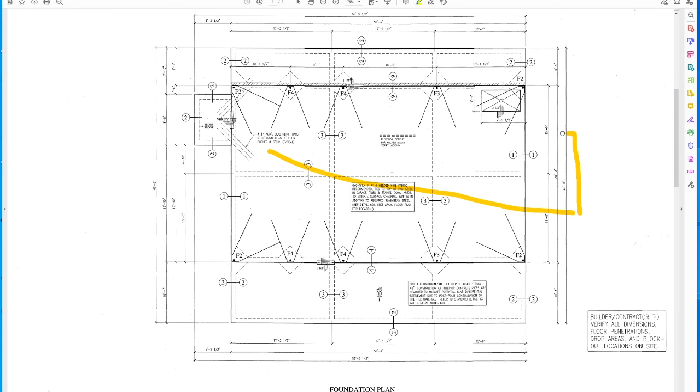So this is all stuff that you need to read, okay? For example, let me try to draw it for you. If your ground looks like this, and then you come in and build your slab, you fill it in like this, and then you put your slab on top. If you have more than 48 inches of fill from here to here, you need to put piers in there. So you've got to read these plans.

What happens is, if you don't follow these plans to the T... see, you have to do a pre-pour inspection. You cannot pour until you pass by the engineer. Otherwise, it is not an engineered foundation. This is what the engineer tells you to do. Without a pre-pour inspection that you passed, technically you don't have an engineered foundation, okay?

So you need to be able to pass, or your builder or your concrete guy needs to have proof that they passed this inspection, because until then you have nothing. And obviously the only way to pass it is if they do it exactly like the engineer recommended. So all these notes are very important. Now let's go. Oh, by the way, down here it tells you the scale.

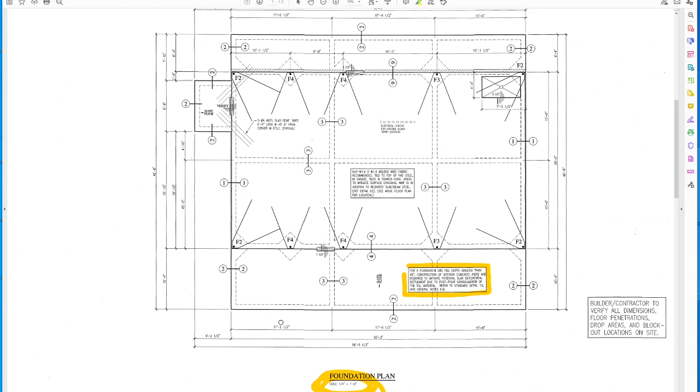So we kind of touched on that real quick, but the first thing you need to do is find a dimension that is fairly easy to read. For example, this one, 15 feet, okay? You need to scale with your tape measure from here to here and make sure that you get exactly 15 feet. Because if you don't, then your plans are not to scale.

Now, if you don't need to scale anything, it doesn't matter, because you can simply follow these dimensions. But if you have to scale anything, you're going to be off. Okay. So anyway, that's where we're at so far.

Let me read some comments right quick. Could you discuss the reason for not using post-tension style? I don't have a reason. I'm going to do a video soon about it because we quit using it, but it's not because of low performance. It's mainly because it's a nightmare to get it done around here. You have to send subs back and forth. It's a nightmare.

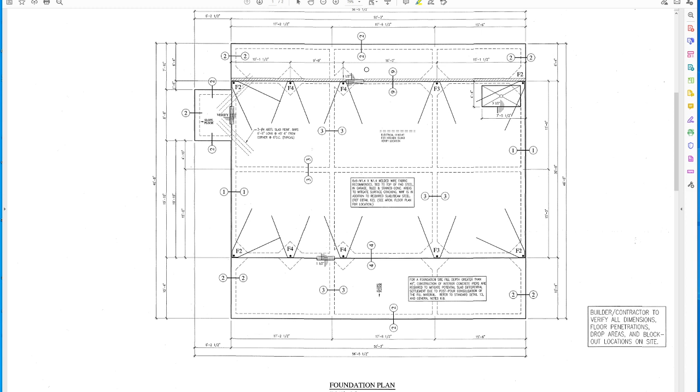And all these footers right here, they have F3, F2, F4, F4, F2. So what does all that mean? Okay, so let's look at 2 first. So the 2 right here means notes on page 2, okay? So you're gonna go to the second page and you have to find number 2 right here.

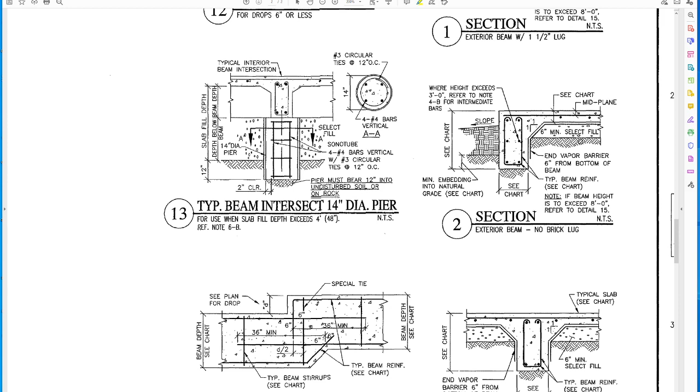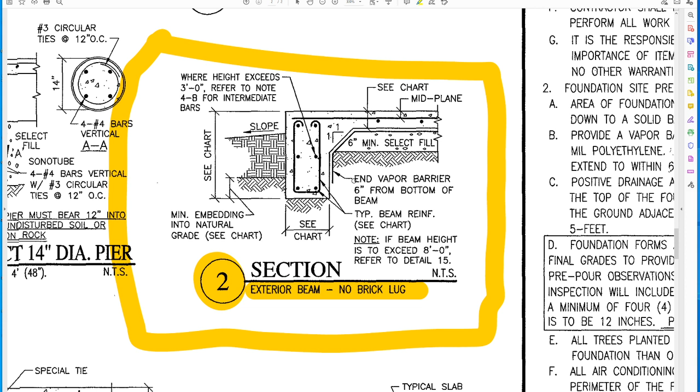This is number 2 right here, okay? It says exterior beam, no brick lug. It tells you right here exactly how to build this beam. A lot of people ask us how come we don't do the vapor barrier all the way to here. Right here, this is why. It says right here, end vapor barrier 6 inches from bottom of beam. So that's how we do it.

Again, you have to be very careful to read everything because that's how you have to follow their plans. Different people do it different ways, but this engineer is asking you to do it this way, so you have to do it that way, or you may not pass inspection. Here's your stirrups, okay?

And it tells you right here, see the ground outside the foundation? It tells you that you need to have your ground sloping this way, and it says see chart. We're gonna go look at that chart shortly, but let's look at the rest of the notes. It says where height exceeds 3 feet, refer to note 4-B for intermediate bars. These mid bars are not needed unless that beam is deeper than 3 feet.

So you need to have 6 inches minimum of the select fill, and then it says typical beam reinforcement. Here's a note: if beam height is to exceed 8 feet, refer to detail 15. So when I say you need to read plans, you literally need to read the plans because it's all here.

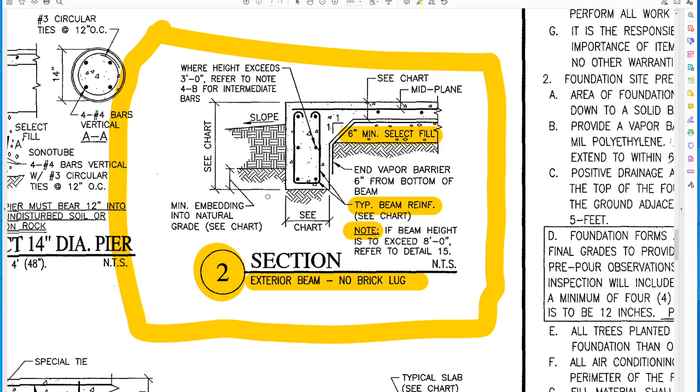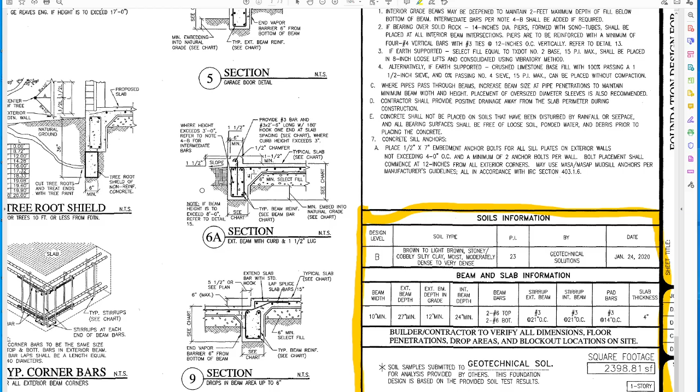Okay, D height is asking, what does no brick lug mean? So imagine a foundation, I'll show you right here. See how the foundation goes this way, and then it drops down and it goes out. This right here is your brick lug. It's just a lug that drops down.

Your foundation's like this, drops down 1.5 inches, then goes out 5.5 inches, and then goes down. And right here is where you're gonna put your brick. The reason for this 1.5 inch drop is so that water doesn't go inside your house. So that's what it means by no brick lug.

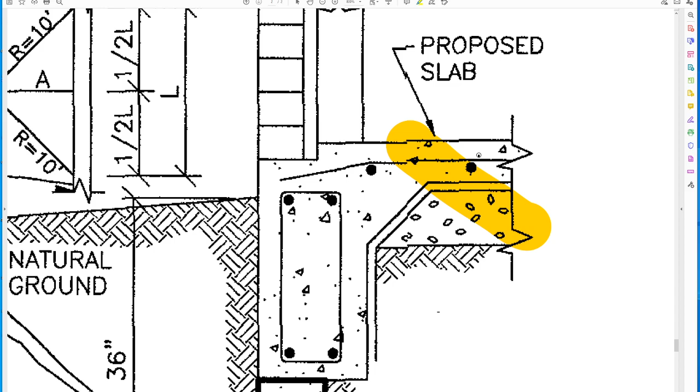All right, let's go back to the chart. So this chart right here tells you what you need to do, what you need to know. It talks about the soil information. So we submitted soils, we submitted soil information, so this is what they used.

So design level B, the soil type: brown to light brown, stony, cobbly, silty clay, moist, moderately dense to very dense. PI is 23. PI stands for plasticity index. The lower the better, within reason obviously, but 23 is very good. If you get above 30, you're starting to get into very expensive soils. So that's how that works. It shows who it was done by and when they did the soil report.

Here is the chart that you need to really pay attention to. This is your beam and slab information right here. So your beam width, how wide those beams need to be. They need to be 10 inches, 10 inches wide or wider.

They can be wider. So exterior beam depth, that means how deep your perimeter beams are. 27 inches minimum. You see that it says minimum there. They can be taller. Obviously, if you have sloping ground, as you saw up there, they have a different detail if you go above 8 feet, but minimum is 27 inches.

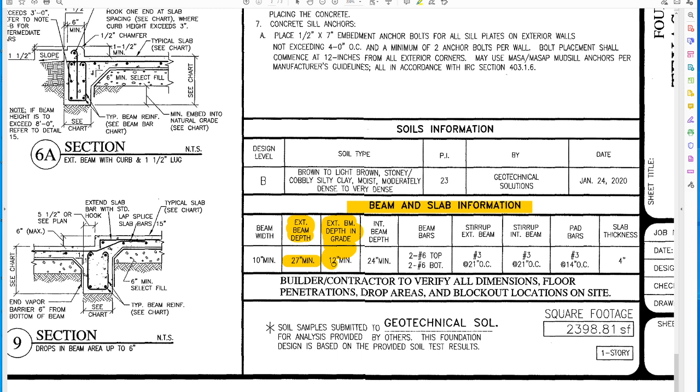This one is super important right here. It says exterior beam depth in grade. What that means is you have your perimeter beam here. I'm going to try to draw it over here for you guys. So you have your perimeter beam. Let's just say, back to your fill dirt, this is what your pad looks like, and then you have this much fill right here. Then you put your slab up here, your forms, and then you come in here and you dig your beam right here.

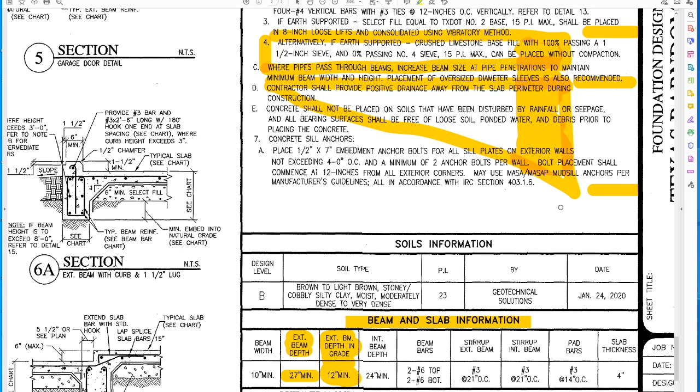And you come in here and you go 27 inches from here to here. And let's just say your fill dirt is 24 inches from here to here. You need to be 27 inches minimum, but also you need to make sure that you are, like it says here, 12 inches into grade. Grade means undisturbed ground. See, this right here is all fill dirt. That does not count as grade.

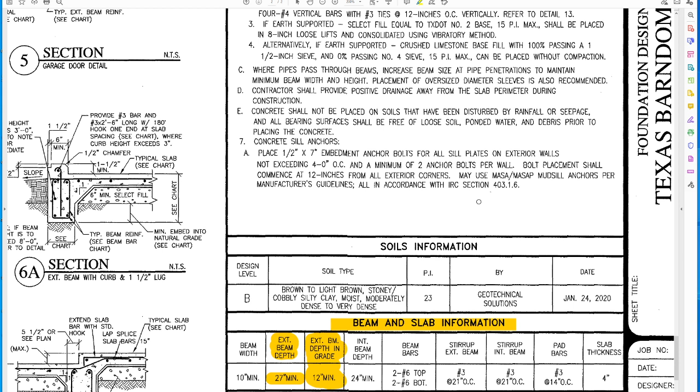So first you need to get through that fill dirt, and then you need to go 12 inches into grade. This is your grade. So if you only go 27 inches, you are not going to pass your inspection, because you have to take those two into account: the exterior beam depth of 27 inches minimum plus your exterior beam depth in grade. So that's very, very important.

I've seen people fail foundations because they did not pay attention to that second one, the exterior beam depth into grade, because again, they go together.

Enrique said, I think Manny made a video about that. Yeah, I went and checked, and he did not take this one into account, the into grade, so we had to dig it up after the rebar had been put in. So Manny learned his lesson, he did not look at the second one. So yeah, Manny made that mistake.

So anyway, moving on. The next item says interior beam depth. That's pretty simple. That just means your interior beams, how deep they are. You have perimeter beams, and then you have your interior beams. The interior beams need to be 24 inches minimum.

Now right here you have beam bars. You have 2 number 6 on top and 2 number 6 on the bottom. That just means your rebar. The number on rebar means how many eighths are in that piece of rebar. So a number 6 is 6/8, which means it's a 3/4 inch rebar.

That's what that means. Typically we use a number 3 or number 4 on the mat, on the surface. Number 3 is 3/8, number 4 is 1/2 inch, and so on. Speaking of that, here is your stirrup for the exterior beams right here. The stirrups are number 3s, which are 3/8, 21 inches on center. So your stirrups need to be every 21 inches.

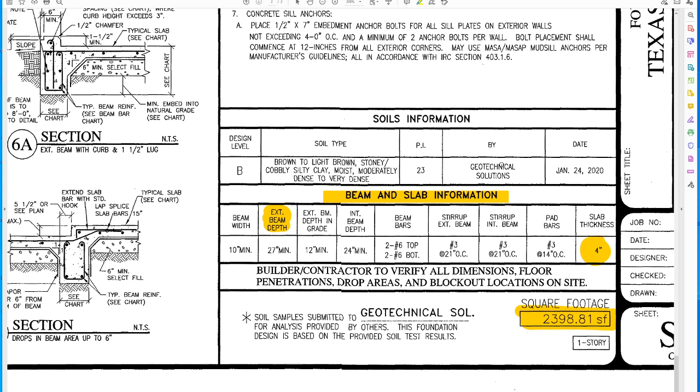Ramon Garcia: can you make a video on how to square a building on the footer? I have that video, Ramon. Go to my early videos, and I did one on how to square up a foundation. It's one of the very early ones. So go to our channel, go to the very beginning, and I have one on there. It goes into very deep detail on how to do that.

What's the diagonals on the footers? Oh yeah, we still got to talk about that. We'll get there. Who does our slab engineering? We use GE Reeves Engineering. That's who we typically get the plans from.

Are the bottom bars tied to the other metal to keep them off the bottom of the trench? Yes, they are tied with the stirrups, and of course then we put bricks under there. You do not want your rebar touching dirt anywhere or touching your forms. If you look at these drawings right here, it is very clear, it shows right here.

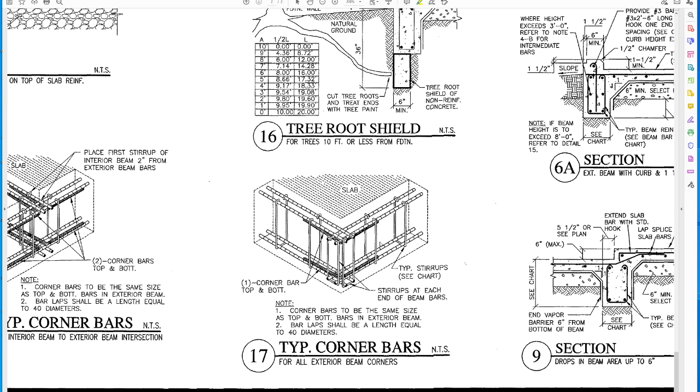Every drawing that they have shows rebar. Of course, here's how you're supposed to tie your corner bars. Right here, okay? They give you very detailed drawings of how to, this is your corner bars right here, how you're supposed to tie them. And it tells you right here, these are your stirrups. And remember, these are 21 inches spacing. You need to have stirrups at the very end.

This is one right here where people a lot of times will fail inspection. A lot of the rod busters, the guys that do the rebar, they start with this stirrup right here, and this one here, and then they tie these bars here, here, here, and here. And same on the bottom, and then they do the corner bars, and they're done. And then the inspector comes, and the first thing he's going to notice is that these stirrups right here are missing. You need to put them in while he's there, or you're going to fail your inspection.

What does that mean? That means, one, you're gonna have to delay your pour. Number two, you have to pay for your inspection again. So you do not want to fail your inspection. Of course, you have more notes right here. It says corner bars are the same size as top and bottom bars and exterior beams.

Number two, right here, this one's important. Bar laps should be a length equal to 40 diameters. What does that mean? Well, we're doing number 6 right here, so you multiply 3/4 times 40. That's 30 inches. So your beam laps need to be at least 30 inches long. They can be longer than that, but minimum 30 inches, and they will check that. So be very careful.

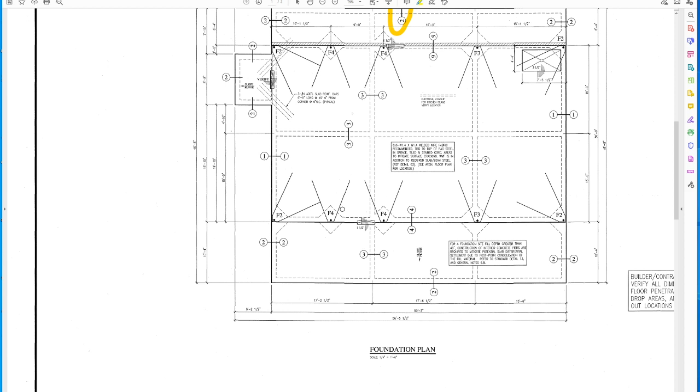Sorry about that. So the diamonds that we're talking about, the pads, you have two types. You have this one, which is half, and then this one, which is full. Okay, and then you go to page 2. Here we go. All right, here we are, and here they are. Okay, here's the half, and here's the full one. Okay.

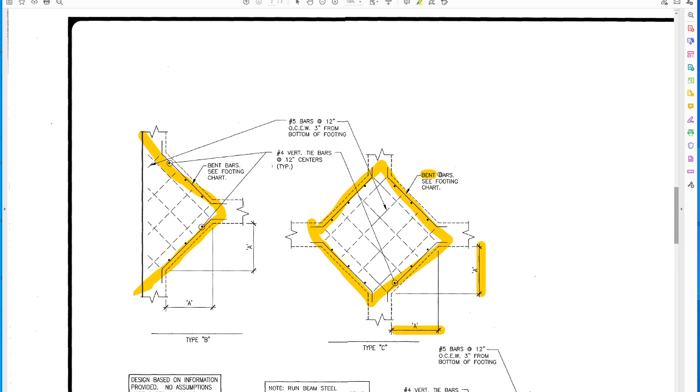All right, and then you have your A dimension. Okay, and it tells you how to tie the rebar. Okay, it tells you bent bars, see footing chart. So that means we have a chart that we need to look at. Here it says number 5 bars, 12 inches on center each way, 3 inches from bottom of footing.

Okay. So remember the F2 and F3 and all that. That's right here. Okay. So if you have an F2, the A dimension is 2 feet. The depth is to match the beam depth. And reinforcing, you have 2 number 6 bar X. Those are the bent bars that they're talking about, and you have top and bottom.

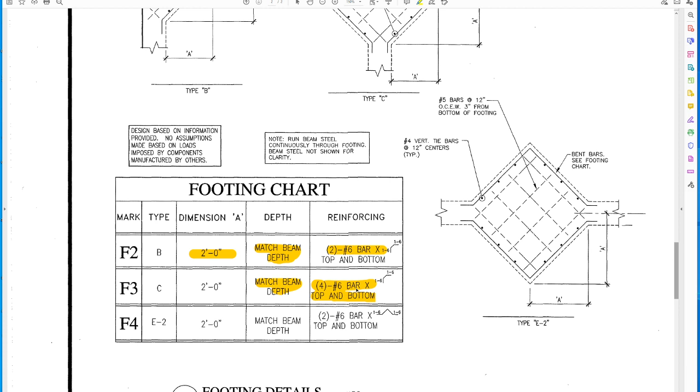Okay. If you have an F3, it's also 2 feet on the A dimension. And then same thing, you match the beam depth, and on this one you put 4 number 6 bars, top and bottom. So the F2 has 2 bars, the F3 has 4 bars, and the F4 you have same thing, 2 feet, match beam depth, but the same thing, you have 2 bent bars. Okay, so that's where we're at so far.

Okay, that's what all these are. Okay, so we're getting there. Any questions so far?

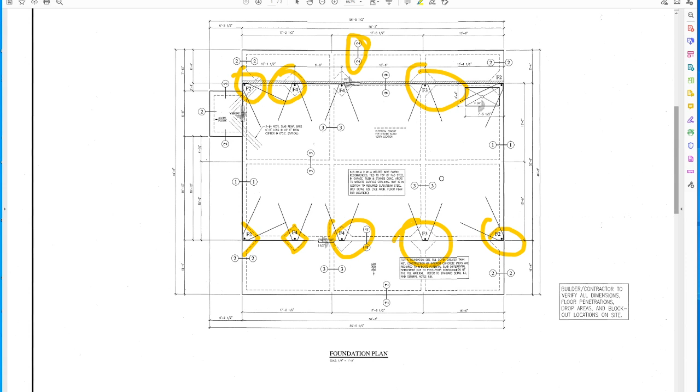So let me see. See this line right here? It's got like diagonal lines on it. That just means you're gonna have stone or brick. That's a brick lug. Okay, so in this particular home, it's gonna have stone across the front. That's what that means. That's all. Nothing major.

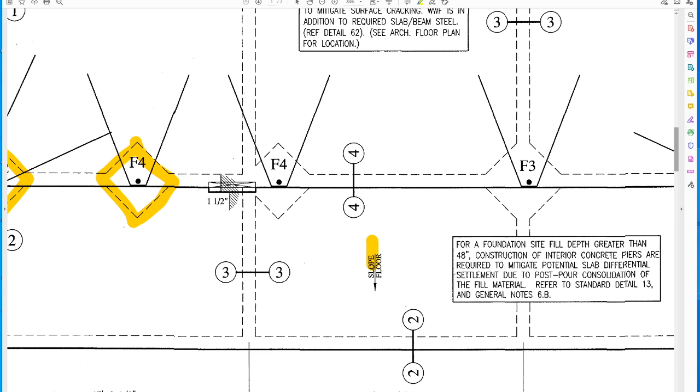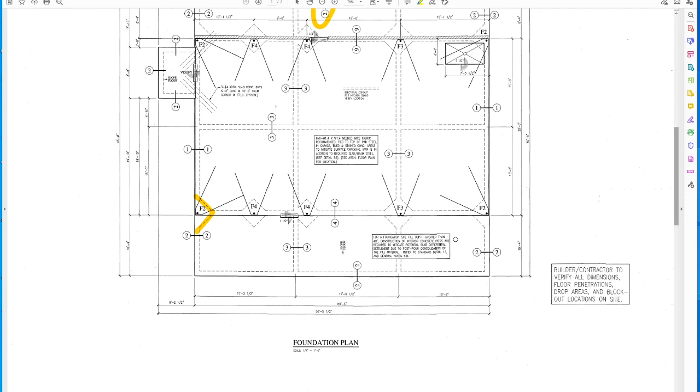Right here, you have to slope the floor towards the front. And of course you have to look at your code, but it's typically 1/4 inch per foot. Okay, so here, see this right here? It says 1.5 inches. That means you're gonna have a 1.5 inch drop from this surface to this one. And then once you get onto this one, then you need to slope this way. Okay, so all that needs to be accounted for. So be very careful that you don't miss any of that.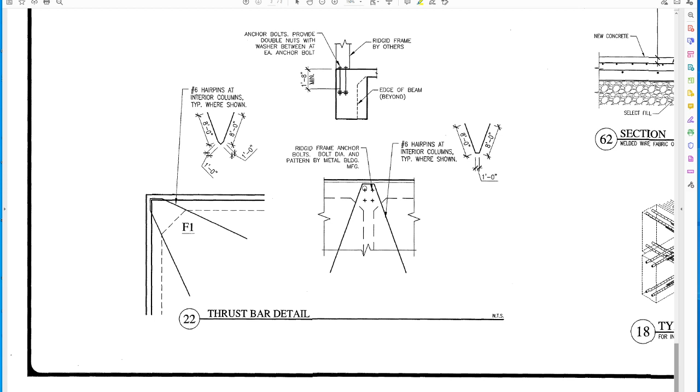Okay, back to the second one. Again, you have all your details on this page. They draw everything out. See those hairpins? We also have those hairpins on the first page. Let me show you what I'm talking about when I say the hairpins. These right here. All these hairpins right here.

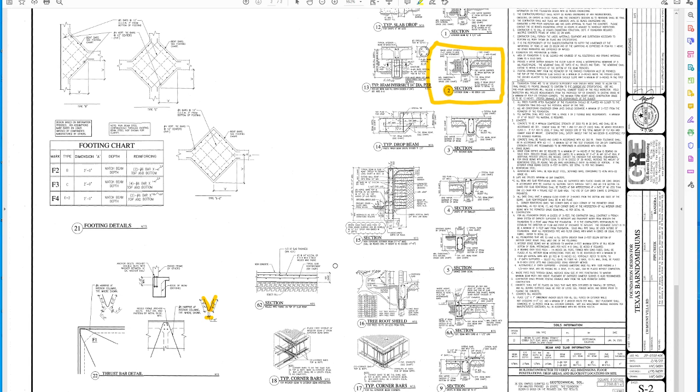Okay, all those are down here. Tells you the dimension. So you can see right here, they're 8 feet by 8 feet, and then they have 1 foot in the center. Right here is 1 foot. Okay, and so they tell you where they go, what size they are, all that good stuff. Okay, and again, just everything's here.

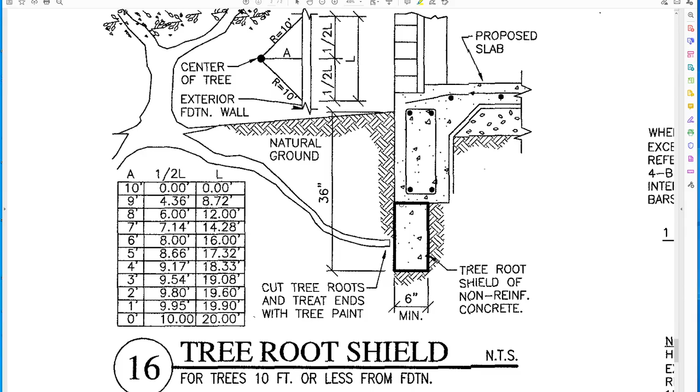If you have trees or anything, you have a detail right here for how to deal with roots. So it's all here. Okay, now here's something very important. If there is something about these plans that you do not understand, call the engineer. They will answer your questions.

Obviously, they don't like it when you call them with very basic questions, such as, you know, hey, I don't understand this dimension over here or whatever. I mean, you don't want to bother them with minor stuff. But if there's something that you really need to know, call them up.

Ask them, because trust me, they would rather answer your question than have to go way out there wherever your house is at and fail your inspection and delay your pour and just cost you a nightmare. So call them up if you have a question. Okay, all right, let's go back to the plans now.

Okay, Blair is asking, what's tying the footers back to the hairpins? Well, we have rebar in there. I don't know if that's what you're asking, but we also have our anchor plates. See this right here? This is where we put our anchor plates to tie our pipes or to weld our pipes for a metal building. That's where the anchor plate goes. And of course, everything's tied with rebar. Not entirely sure this pertains to what you're going over, so sorry if I derail you.

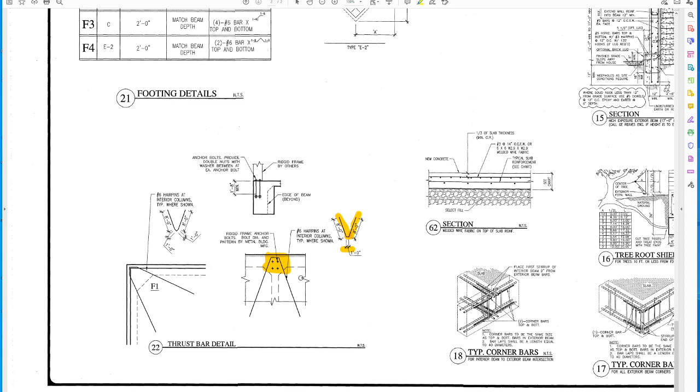Do you ever do waffle slabs? That's what we have in the concrete plan. Looks way different than this. We pour tomorrow. I don't know what you mean by waffle plans. I think this is a waffle plan. This is just not a very big slab. But see, right here, this looks like a waffle. See that? I don't know if that's what you mean.

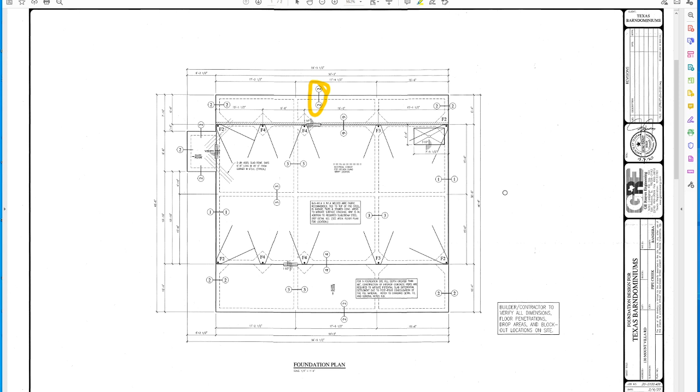The hairpin is the anchor for the footers. No, it is not the anchor for the footer. The hairpin is meant to transfer the flex. In case there is flex, that's where those hairpins are sticking out 8 feet to help with the flex in case that pipe wants to flex. That's what that's for. And of course, they're tied to the mat steel. And the mat steel is tied to all the beams. So that's what the hairpins do. Okay.

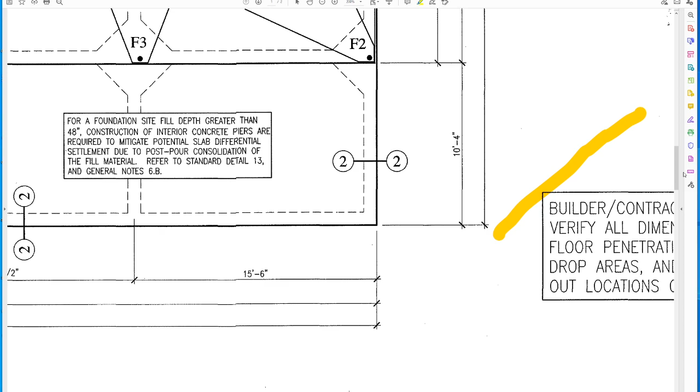All right, back to the plans. We're almost there. Here's the last thing that we need to talk about. Okay, where are we at? Let me go to the second page. Okay, right here. Foundation general notes. Again, read all these notes, okay? Because this is very important.

Number 1, the code basis for the foundation design is IRC 2018. This foundation has been designed as soil supported, stiffened grid type beam and slab foundation and as such will move with soils upon which it bears. So this is a floating foundation. It's meant to move, and if it moves, then it moves. It's not supposed to break off, okay?

Oh, here's something interesting that people give me a lot of heck for every time we show our foundations. Do you see that they are not calling for any expansion joints? Typically, I guess up north they call for expansion joints. Notice that we are not required to do expansion joints, and a lot of people say, you know, concrete guys are a funny crowd.

I did a video about a week ago on a foundation where we were chasing some cracks and filling them in, kind of showing them what we're doing. And oh my goodness, they're like, well, you should have done expansion joints, and you're an idiot, and if you had just done this, whatever. Look at these plans. They are engineered and they are not requiring any expansion joints. So that's how we do it. So again, do what your engineer asks for. Okay, all right, back to the plans.

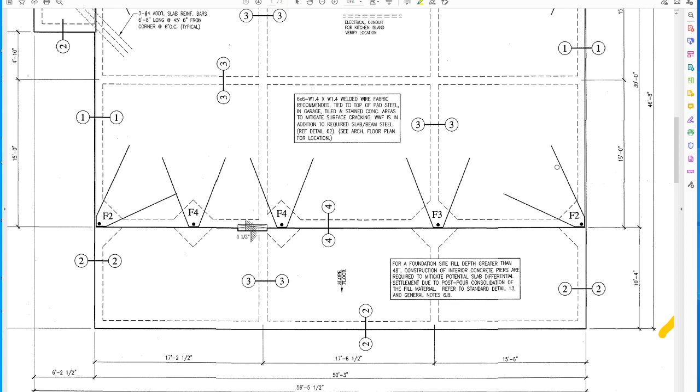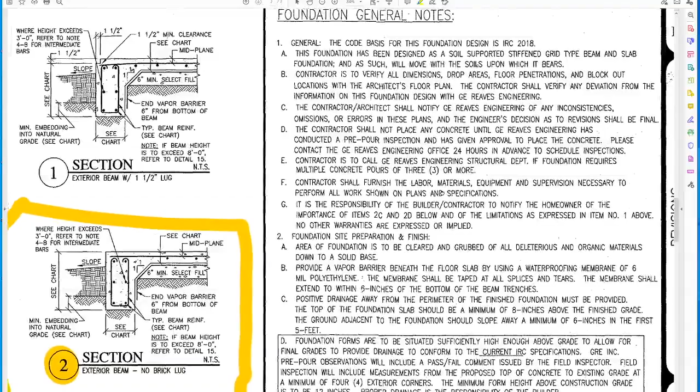Okay, moving on. Let's go to page 2. We started reading these notes right here. These are super important. Let me try to zoom in so you guys can see. All right.

D-Hyde: I'm in Dallas, we have expansion joints in our driveways. Yeah, we do expansion joints on driveways for sure, but we don't ever do them on foundations.

Hey J-Rod, you have people watching from Sesisk now. Awesome, man. I'm glad they're here. I hope they can learn something. There's a lot of knowledgeable people there, and obviously I'm just here trying to help.

All right, so again, read everything. Literally read. Okay, contract, here you go. Right here. Contractors to verify all dimensions, drop areas, floor penetrations, and block out locations with architect's floor plan. The contractor shall verify any deviation from the information on this foundation design with GE Reaves.

So again, it's on you, contractor, builder. A lot of people want to build their own Barndominiums. That's great, obviously I help everyone. However, this is very important: once you do that, you are taking on all the responsibility. C, the contractor or architect shall notify GE Reaves Engineering of any inconsistencies, omissions, or errors in these plans, and the engineer's decision as to revision shall be final. What does that mean?

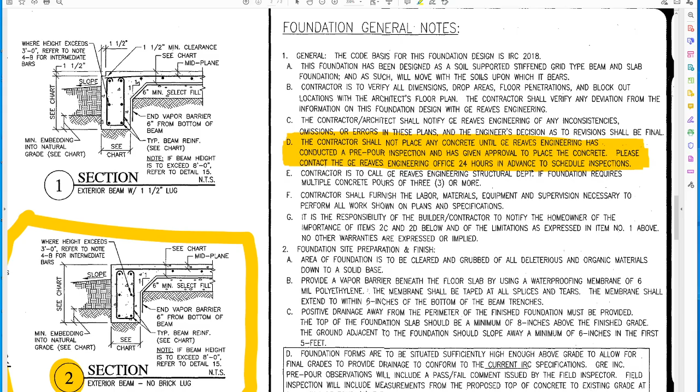Like I was saying earlier, you need to schedule your inspection, and until you have a pre-pour inspection passed, you don't have an engineered foundation. You have an engineered foundation design, but not an engineered foundation, because if it was not done the way they asked you to do it, then it's wrong, and you have nothing until then. Contractors shall call GE Reaves if foundation requires multiple concrete pours of 3 or more.

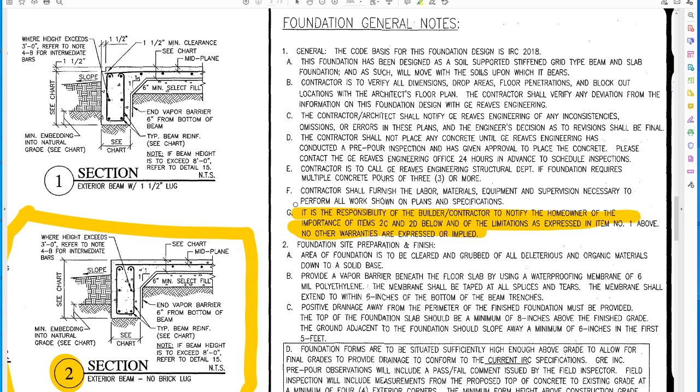Contractor shall furnish labor, materials, equipment, supervision necessary to perform all work shown on plans and specifications. That's pretty standard. Here's another one. It is the responsibility of the builder or contractor to notify the homeowner of the importance of items 2C and 2D below and the limitations as expressed in item number 1 above. No other warranties are expressed or implied. All right, what does that mean?

2C and 2D. Here's 2, here's C. It says positive drainage away from the perimeter of the finished foundation must be provided. The top of the foundation slab should be a minimum of 8 inches above the finished grade. The ground adjacent to the foundation shall slope away a minimum of 6 inches in the first 5 feet. That just means you need to have your ground sloping away from the foundation so that water doesn't puddle around it. That's 2C. 2D, they even outlined it right here.

Okay, foundation forms are to be situated sufficiently high enough above grade to allow for final grades to provide drainage to conform to the current IRC specifications. GRE Incorporated pre-pour observation will include pass-fail comment issued by the field inspector. Field inspector will include measurements from the proposed top of concrete, existing grade at minimum of 4 exterior corners. The minimum form height above construction grade is to be 12 inches. Proper drainage is the responsibility of the builder.

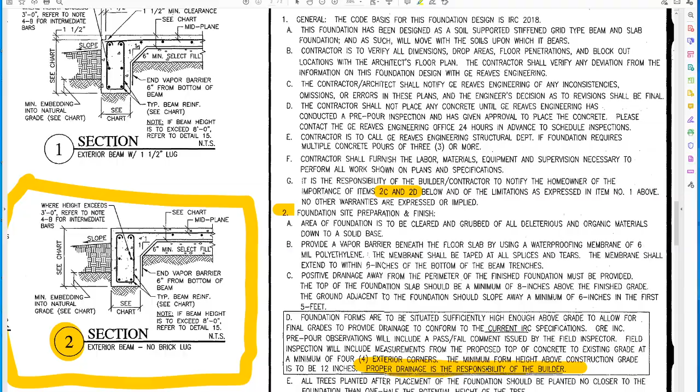Right here, okay? So the builder has a ton of responsibility, okay? I mean, a ton. So again, if you want to be your own builder, I just want you to understand that the builder has a lot of responsibilities. And obviously, if a builder hires you to do the concrete, then you have a lot of responsibility, okay? Because the builder can just simply pawn this off on you, and you need to know this. If you pour this entire foundation and you're only 6 inches off the ground, guess what, buddy? You may have to either add on to it or again, be very careful, okay?

Extremely careful. A lot of times, the builder will ask you not to go as high because, I don't know, they're trying to save fill dirt, or they're trying to something, right? So, the concrete guy, the contractor, he may say, yeah, not a problem. We'll just do a 2x6, no problem. And they'll do it. And guess what? If you don't pass inspection, the builder's just going to say, well, you're the expert here. You're supposed to know these things. So do not deviate from these plans, okay? So anyway, let's go back to it.

Area of foundation is to be clear of all organic materials down to solid base. So that just means clear all your grass. Yes, grass is not a fiber reinforcement material.

The next one, provide vapor barrier beneath the floor slab by using a waterproofing membrane of 6 mil polyethylene. The membrane shall be taped at all splices and tears. Right here, very important. I'm gonna read it again. The membrane shall be taped at all splices and tears. Every time you lay your poly, every seam you need to tape it. If they make a tear, for example, they go in over plumbing pipes or any of that, tape it. It all needs to be taped, okay? They can fail you for that, so be very careful.

All right, keep on going. All trees planted after placement of foundation shall be planted no closer to the foundation than one-half the potential height of the trees. So be careful. Don't plant trees too close to your foundation.

Here's another one. All air conditioning condenser drains should discharge a minimum of 5 feet from the perimeter of foundation. So don't dump your water right on the edge of the foundation. What's going to happen is it's going to add too much moisture to one side of the house. And if you have expansive soil, it's literally going to lift your entire house. And it's going to cause stress, and you're going to get cracks. So be very careful. Flower beds is another big one. A lot of people do flower beds around the perimeter, or maybe just one side of the house, and they water them, and I mean, they look great, but they're bad for your foundation, so careful.

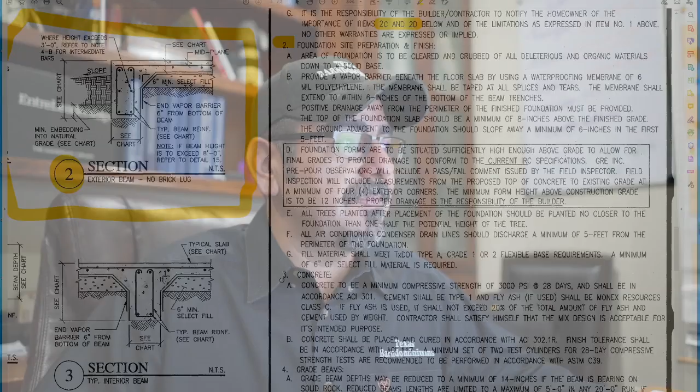Fill materials shall meet TxDOT type A grade 1 or 2 flexible base requirements. A minimum of 6 inches of select fill is required. What does that mean? Don't just put any kind of dirt in there, okay? It needs to be select fill. And depending on where you're at, we're in Texas, so they already have grades of fill that are approved. So that's what you need to use. Again, don't go dig a hole in your yard and put it in here for your foundation, because they will make you dig it all out. So don't do that. All right.

Concrete. All right. Concrete shall be a minimum compressive strength of 3,000 psi at 28 days. It should be in accordance with ACI 301. Cement shall be type 1, and fly ash, if used, shall be Monex Resources Class C. If fly ash is used, it shall not exceed 20% of the total amount of fly ash and cement used by weight. Contractor shall satisfy himself that the mix is acceptable for its intended purpose.

Again, I'm gonna read that again. Contractor shall satisfy himself that the mix is acceptable. So if your foundation fails and it's because of the concrete, it's on the contractor. And if you are your own builder, it's on you. So you cannot just blame the concrete company.

The note said flexible base. It's different than select fill. Let me see, let me go back. Grade 1 or a minimum of 6 inches of select fill is required. Again, it's just not any type of dirt. You have to use good dirt. All right, let's keep on trucking.

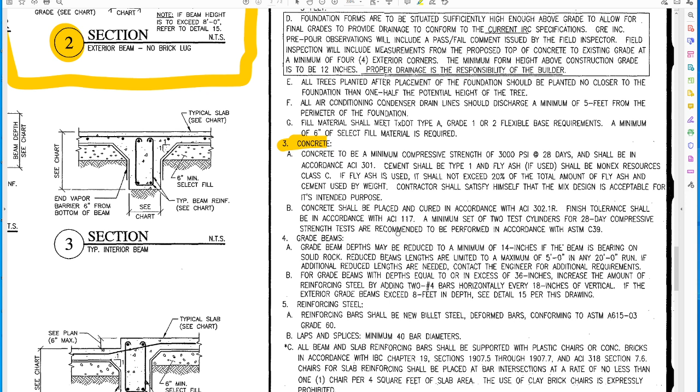Concrete shall be placed and cured in accordance to ACI 302.1R. Finish tolerance shall be in accordance to ACI 117. A minimum set of 2 test cylinders for 28-day compressive strength tests are recommended, in accordance to ASTM C39. So they recommend that you take some cylinders to do some compressive testing. We actually don't do that, but we need to. I want to be able to have that information.

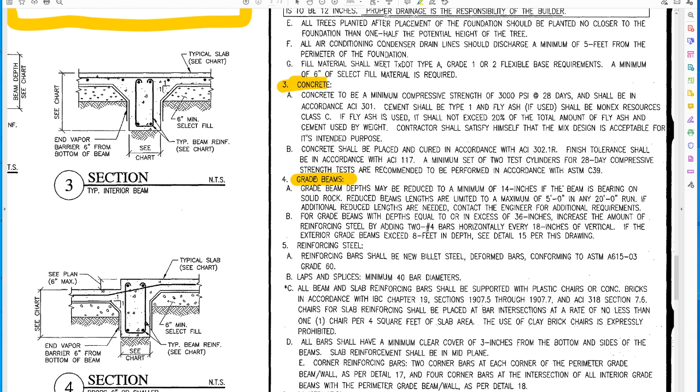All right, here we go. Grade beams. Grade beam depths may be reduced. So for example, we're in the hill country, right? A lot of times we do work in the hill country. And if you run into a place that has a lot of stone, a lot of rock, then again, this is why it's very important that you read everything before you even get started, okay? Right here.

Grade beam depths may be reduced to a minimum of 14 inches if the beam is bearing on solid rock. Reduced beam lengths are limited to a maximum of 5 feet in any 20-foot run. If additional reduced lengths are needed, contact the engineer for additional requirements. So if you have 20 feet, you can actually reduce that beam depth to 14 inches if you are on solid rock, but only for 5 feet, okay?

So if you have a big rock that spans like 10 feet, you need to dig 5 feet of those out down to 27 inches. And for 5 of those feet, you can leave it at 14 inches. So again, be very careful. And obviously, if you have more than that, you can call the engineers and they'll tell you what you can do.

So grade beam depths in excess of 36 inches, increase the amount of reinforcement steel by 2 number 4 bars horizontally every 18 inches of vertical in exterior beams. So that just means if you have a beam that's more than 36 inches deep, then you need to put 2 mid bars, okay? And every 18 inches. So if you have a beam that's 48 inches, then you do 2 sets of mid bars. That's what that means.

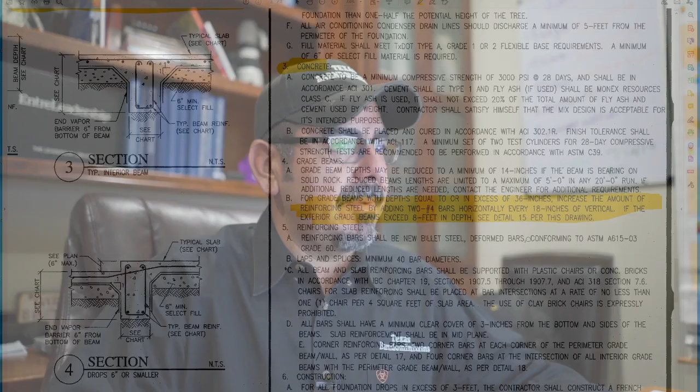Reinforcement bars shall be billet steel, deformed bars conforming to ASTM A615-03, grade 60. All right, here, very important that you get grade 60. Well, at least we need to get grade 60. There's different grades of rebar, okay? Obviously, grade 60 is more expensive than, I think the other one's 40 or 20 or 30. I don't remember. I think they're grade 40.

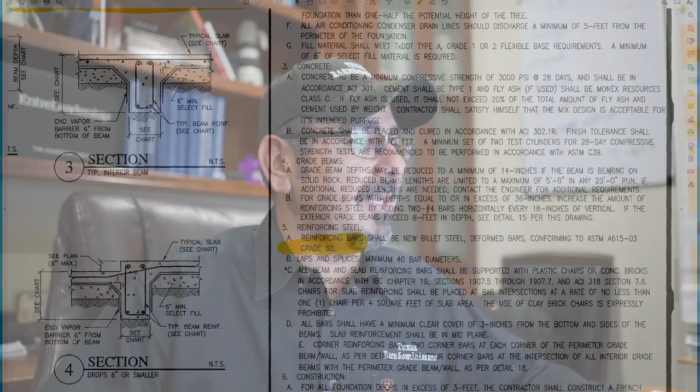So very important that you do not go and buy some grade 40 because they're cheaper. You're going to save a bunch of money, and then you put it all in and you don't pass inspection, and then you have to take it all out and replace it with grade 60. So it all matters, okay? So again, grade 60. Laps and splices, a minimum of 40 bar diameters. We discussed this earlier. If you have 1/2 inch rebar times 40, it's 20 inches minimum splice, okay?

All beams and slab reinforcing bars should be supported with plastic chairs or concrete bricks in accordance with IBC chapter 19, blah, blah, blah. That just means support your rebar. Don't let it sit on the ground.

So this is funny. Now that I mention this, you guys are going to go and check it out. Every time you see a concrete video on YouTube or Facebook or anywhere, and you see that the rebar is on the ground, immediately go to the comment section and see how long it takes for somebody to mention that the rebar is on the ground, because that is a huge no-no. Concrete guys like to pick on other concrete guys if the rebar's on the ground, because that is concrete 101, okay? A lot of times they will actually lift the rebar as they're pouring. But anyway, just keep that in mind next time you see a concrete video, and if the rebar's on the ground, go to the comment section.

All right, let's see. Texas forever: we have 30-inch beams and use number 5 top and bottom, but not in the middle. We use grade 40. I'm somewhat concerned now. Yeah, well, if it was engineered, you need to talk to the engineer.

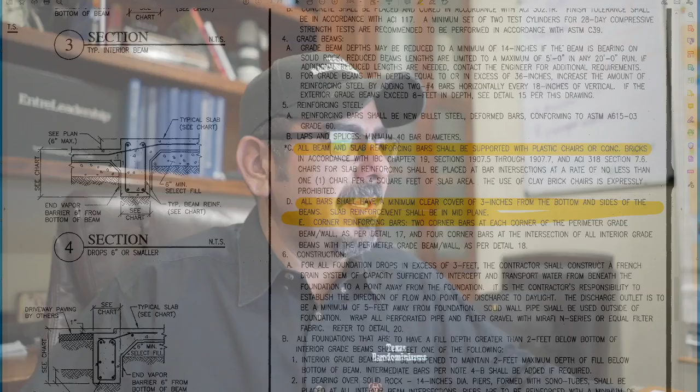Obviously on the mat, you only have 2 inches, right? Because it says right here. So again, this is one of those that you need to read very carefully. It says right here, all bars should have a minimum clear cover of 3 inches from the bottom and sides of the beams. Okay, so that's the beam reinforcement. Slab reinforcement shall be in mid-plane. So everything in your beams has to have 3 inches all the way around.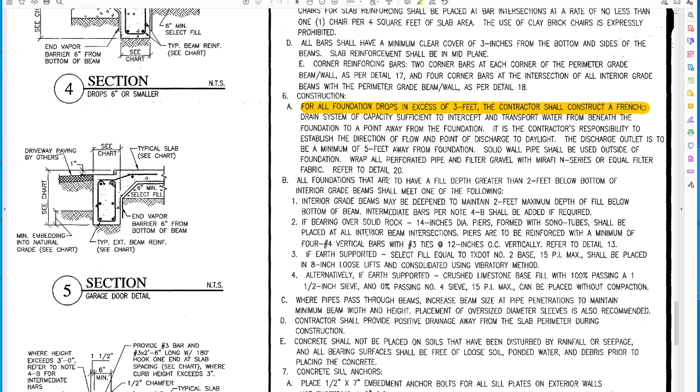Construction for all foundation drops in excess of 3 feet. The contractor shall construct a French drain system capacity sufficient to intercept and transport water from beneath the foundation, blah, blah, blah. So again, just details that you need to do if you have special details, you know.

All foundations that are to have a fill depth greater than 2 feet below bottom of interior grade beam shall meet one of the following. Interior beams may be deepened to maintain a 2 feet maximum depth of fill below the bottom of the beam. Intermediate bars per note 4B shall be added if required.

If bearing over solid rock, 14 inch pier diameters formed with sonotubes shall be placed at all interior beam intersections. Piers are to be reinforced with a minimum of number 4 vertical bars and number 3 ties at 12 inches on center vertically. Refer to detail 13. Let's go to detail 13 so we can see what they're asking. There's 15. Come on. 13 right here. It tells you how to do the piers right there. All right, so it's all here. It's all on your plans, okay?

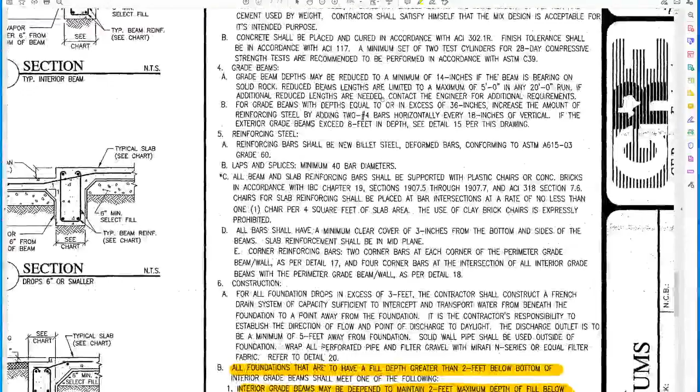If earth is supported, select fill equal to TxDOT number 2 base, 15 PI max, shall be placed in 8-inch loose lifts and consolidated using vibratory method. So if you have a lot of fill to build up, you can do one of these. You have options, okay? So pick the best one and go with that.

Where pipes pass through beams, increase beam size at pipe penetration to maintain minimum beam width and height. Placement of oversized diameter sleeves is also recommended. Okay. So this is an interesting one. A lot of times the plumbers, see, you have your beams, right? And you know, they're dug and you have your rebar and all that good stuff.

And a lot of times the plumbers, especially when they're running PEX lines, it's really easy just to run the PEX line down the beam. I mean, they just run the whole thing, they run it in, they pull it, and you know, they can go 40 feet, no problem.

It is not going to be allowed by the engineers. Not gonna fly, okay? That is actually every pipe that you run inside that beam. So check it out over here. See, your stirrup looks like this. Okay. You should not have anything inside of here. Anything that you put in here is taking away concrete, and this is where the reinforcement beam gets its strength. So if you're gonna run any pipes, what they're saying is, here's your beam, and your stirrups are in here with your beam, right?

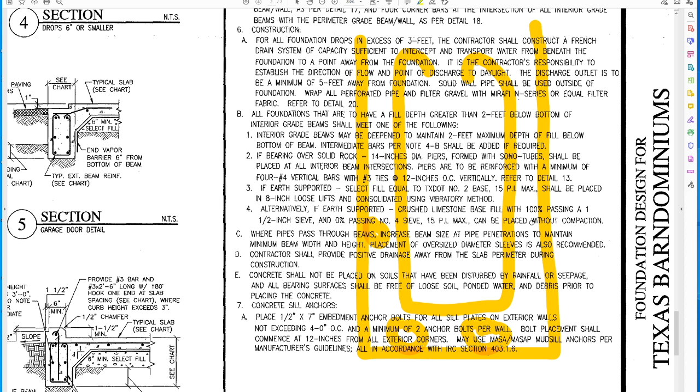If you're gonna run pipes or anything, you need to make the beam deeper so that you can run pipes down here or on the side or wherever. It just needs to be outside of your stirrup. So if you're gonna do that, make sure you plan accordingly, okay? And do not let your plumbers run pipes inside the beam because you're going to fail inspection, okay?

I'm a builder now, so it's a lot easier. But back then, when I was only a concrete contractor, I used to fight with plumbers all the time because they just want to run the pipes down the beam because it's really easy. But of course, they'd run all their pipes, collect the check, go home, inspector shows up, I fail inspection because of them. Not cool, man, not cool. So be very careful with that.

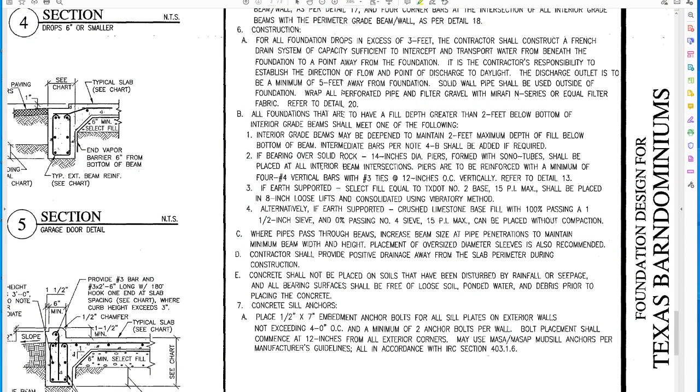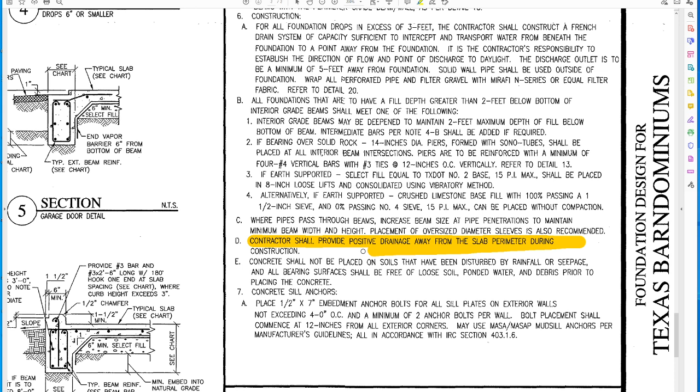All right, what else? Contractors should provide positive drainage away from slab perimeter during construction. Same deal as earlier. Make sure you don't have water puddling around your foundation. Concrete shall not be placed on soils that have been disturbed by rainfall or seepage. And all bearing surfaces shall be free of loose soil, ponded water, and debris prior to placing concrete.

So if everything's ready to go, everything's verified, and it rains, you're not pouring. You cannot pour. So we carry pumps in the trailer to pump water out, because the minute it rains, you need to get somebody out there. It doesn't matter if it's 5 a.m. or whatever. You need to get somebody out to the job site and pump all that water out of those beams, because if that water sits in those beams, water's going to seek the lowest level, which is your reinforcement beams.

If you have a big rain, those beams are going to fill up, and it's going to soak everything, and then your waffle is going to collapse. And now you have a real nightmare on your hands. If you go and pump all that water out immediately, it's a lot better, and it's going to dry out a lot faster. So make sure you do that. And obviously, if it's wet, they're not going to let you pour. So you shouldn't pour.

Almost done. Concrete anchors placed, 1/2 inch embedded anchors. So if you're doing a residential foundation, not a barndominium, you need to put anchor bolts all the way around, every 4 feet on center, and a minimum of 2 anchor bolts per wall. Bolt placement shall commence 12 inches from exterior corners. May use mud sill anchors per manufacturer's guidelines, all in accordance with IRC section 403.1.6.

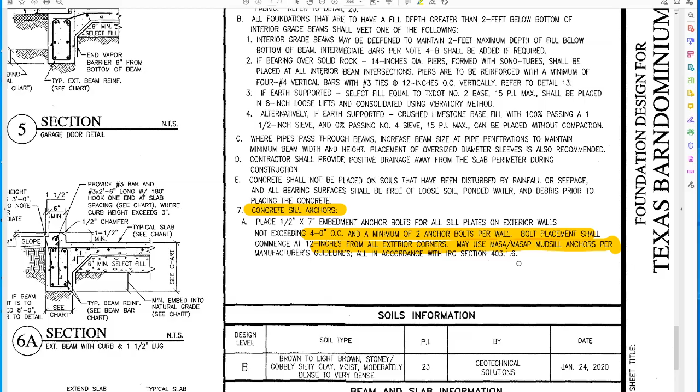So that just means you need to put anchor bolts. For barndominiums, we don't need them because we have anchor plates, but when we do interior walls, then we anchor those to the concrete.

All right, man, that was a lot, but I hope you guys learned something, because there is a lot on these plans, but you need to read them. If you don't read them, you're gonna fail your inspection, or worse, you're gonna pass it, and then you just built a subpar foundation, and you paid all that money, all that time for nothing. So be very careful.

If you have a foundation that's very cut up, let's just say this foundation was like this, and then you had a window, or, you've seen those custom homes, how the concrete is never straight, and then they have some like this, anyway, this you would do rebar for sure, because post tension works best if you have a grid like this, you know what I mean?

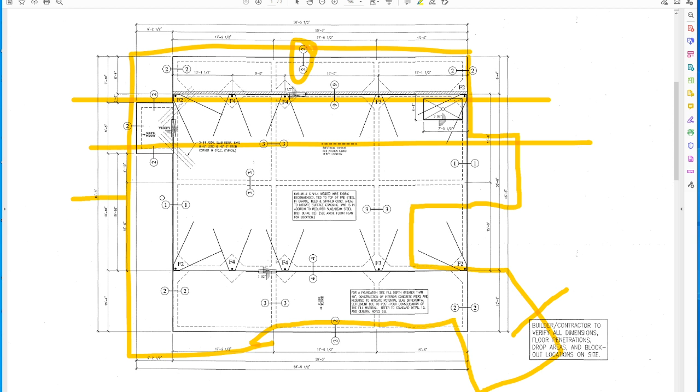And if you have crazy kickouts like typical custom homes tend to have, then you need to do a lot of short cables and a lot of crazy stuff. So it's better to just do rebar in those foundations. So they have their place.

Focus was a little off, but content was very important. What do you mean focus? On my camera? Now you got me. We've been binging your videos during quarantine. Love your content and the comedy between you and your crew. Well, thank you, Texas Forever. We have fun, man. We enjoy it.

Can you show us the detail on your shower drains? I don't know what you mean by that. I'm sorry.

What we would do is use tie wire to hold up the cables instead of the nails, so we could wreck the forms the same day. Yeah, that would work, but we still have to wait for the engineers, so it's a nightmare.

Can you put up a commercial plan and also show us how to read survey stakes? I'll probably do that some other time. I think the next video that I'm going to do live stream is going to be on reading the architectural plans. Because reading plans is extremely important.